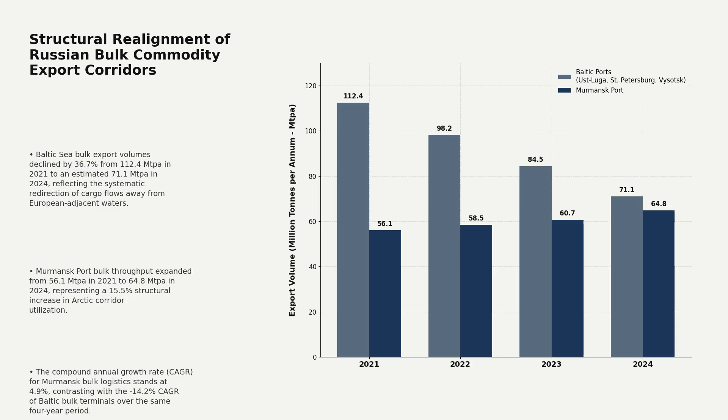The data shows a clear divergence. Baltic port bulk exports fell 36.7% between 2021 and 2024, dropping to 71.1 million tons per annum. Meanwhile, Murmansk bulk throughput expanded 15.5% to 64.8 million tons. This represents a structural shift rather than a temporary market fluctuation. The compound annual growth rate for Baltic terminals is -14.2%. In contrast, the Arctic corridor shows a steady 4.9% expansion.

Building marine terminals is insufficient without matching overland logistics. The new Lavna coal terminal features a design capacity of 18.0 million tons per annum. However, initial throughput is severely restricted by linear rail infrastructure. The primary physical bottleneck is the 46-kilometer West-Kola rail link and its 1.3-kilometer bridge over the Tuloma River. This single-track bottleneck caps initial capacity at 9.0 million tons.

Full double tracking and electrification must be completed to unlock the remaining terminal capacity. Projected actual throughput is modeled to scale from 4.5 million tons in 2024 to 18.0 million tons by 2030. This timeline depends entirely on the synchronization of the broader Oktyabrskaya railway network upgrades.

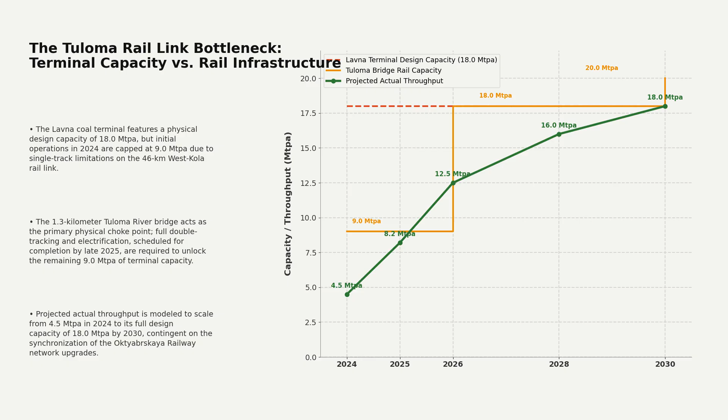The strategic value of Murmansk lies in its unique hydrographic profile. Located on the ice-free Kola Bay, the port features a 20.0-meter deepwater draft. This allows unrestricted loading of Capesize vessels up to 150,000 deadweight tons.

In contrast, Baltic ports face severe physical limitations. St. Petersburg is restricted to an 11.0-meter draft, capping vessel sizes at 40,000 deadweight tons. This shallow draft increases per-ton shipping costs by forcing the use of smaller vessels for long-haul Asian routes. Furthermore, Baltic and Black Sea routes remain vulnerable to maritime choke points like the Danish Straits and the Bosporus. Murmansk bypasses these geopolitical bottlenecks entirely, offering direct access to the open ocean.

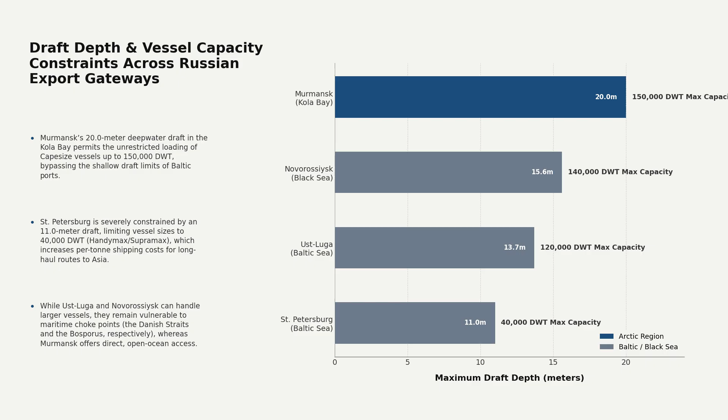This infrastructure push mirrors the historic Murmansk run of World War II, where the Kola Bay served as a vital ice-free lifeline.

The commercialization of solid-state batteries is fundamentally bottlenecked by the physical metallurgy of lithium. Lithium is extremely soft and highly cohesive. During mechanical reduction, the metal adheres aggressively to work rolls. This causes surface tearing and catastrophic foil breakage at thin regimes.

The data reveals a severe yield collapse as foil thickness decreases. At 50 microns, mechanical yield is 98.5%, and scaled down to 10 microns, yield drops to just 12%. This collapse is driven by high tensile stress and roll adhesion tearing. Simultaneously, defect density spikes exponentially. Defects rise from 0.12 per square meter at 50 microns to 35.0 at 10 microns.

Solid-state designs require foils under 20 microns to exceed 400 watt-hours per kilogram. This forces production directly into this low-yield, high-defect regime.

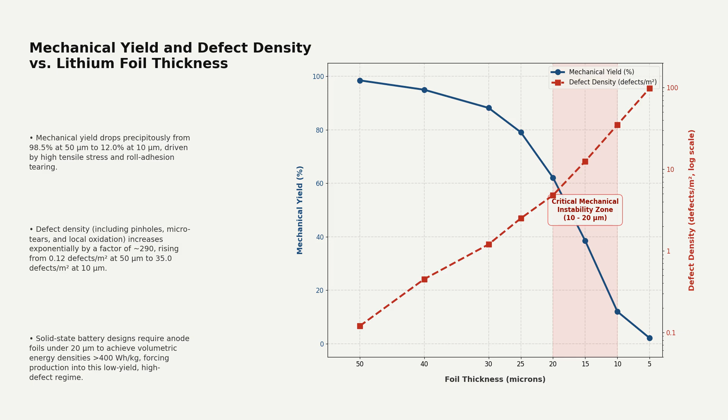Lithium's extreme chemical reactivity introduces severe thermodynamic constraints. The metal reacts spontaneously with atmospheric moisture and nitrogen. This forms highly resistive passivation layers of lithium hydroxide and lithium nitride. These layers degrade the electrochemical performance of the anode.

To prevent degradation, manufacturing must occur in ultra-dry environments. At a standard dew point of -30 degrees Celsius, the passivation layer grows at 1.25 nanometers per minute. Lowering the dew point to -60 degrees reduces this growth to a negligible 0.004 nanometers per minute.

However, this environmental control imposes a nonlinear economic penalty. Operating expenses increase 6.8 times when moving from -30 to -60 degrees. This is driven by the extreme energy demands of multi-stage desiccant wheel regeneration.

Manufacturers face a stark trade-off between throughput, capital cost, and foil thickness. Mechanical rolling is the current industry baseline. It offers high line speeds of 15 meters per minute and a low capital cost of $12.5 million per gigawatt-hour. However, it is physically limited to a minimum thickness of 20 microns.

Alternative deposition methods bypass this physical limit but introduce severe economic penalties. Physical vapor deposition can produce layers down to 2 microns. Yet, it requires high vacuum systems that slow line speeds to 2.5 meters per minute. This drives capital costs up to $45 million per gigawatt-hour.

Molten lithium coating represents an emerging compromise. It achieves 10-micron thicknesses at 20 meters per minute. However, this process requires complex surface tension management and high-temperature liquid lithium handling.

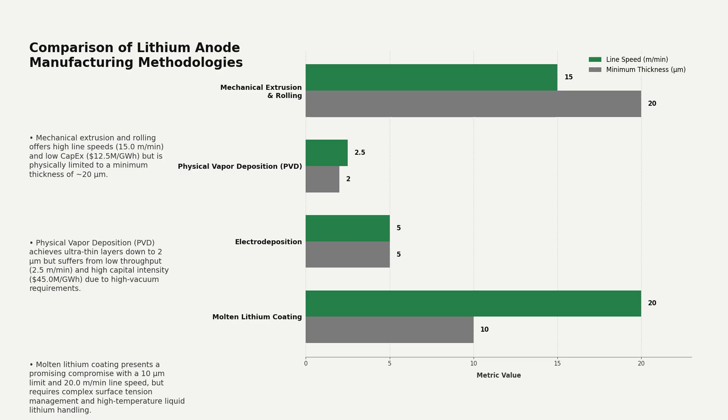This manufacturing bottleneck is structurally analogous to early 20th century aluminum rolling, which required specialized multi-roll cluster mills to overcome similar tensile failures. The commercialization of high-field magnet technologies depends on second-generation high-temperature superconducting tapes. These tapes require near-perfect crystalline alignment on a flexible metal substrate.

This alignment is achieved by depositing a nanometer-thin template of magnesium oxide using ion beam-assisted deposition.

The manufacturing process is constrained by a severe throughput mismatch. While substrate electropolishing operates at 150 meters per hour, the critical texturing step is limited to 60 meters per hour. The active superconducting layer deposition is even slower, running at 20 meters per hour.

Although the active layer deposition has the lowest linear speed, the texturing step is the primary structural bottleneck. Any crystalline defects introduced during texturing propagate through all subsequent layers, ruining the tape. Furthermore, the high vacuum systems required for these two steps account for over 75% of total capital costs.

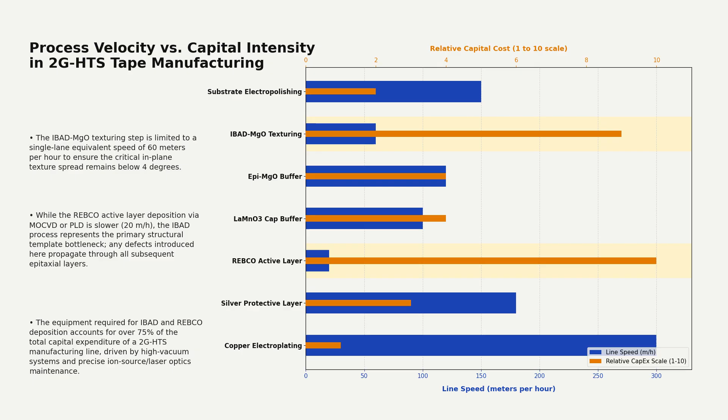The scaling of commercial fusion energy has created an unprecedented demand shock for superconducting tape. Private fusion startups require massive quantities of tape to construct compact, high-field tokamaks. This demand is scaling exponentially, far outstripping current industrial capacity.

The data illustrates a widening structural deficit. Global production capacity is projected to grow from 1,200 kilometers in 2020 to 18,000 kilometers by 2028. This represents a 40% compound annual growth rate.

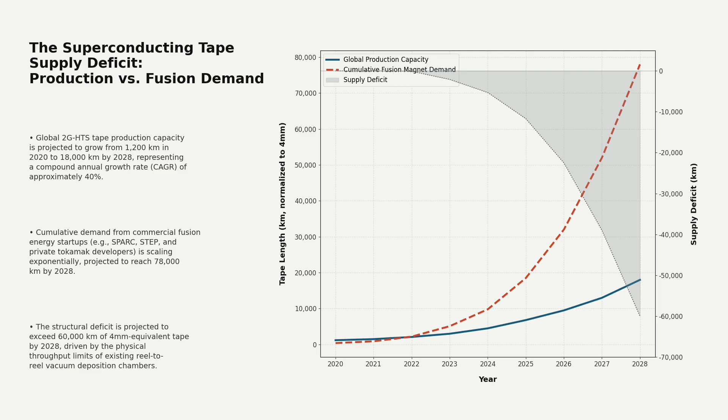However, cumulative fusion magnet demand is projected to reach 78,000 kilometers over the same period. This mismatch creates a structural deficit of 60,000 kilometers of tape by 2028. The bottleneck is physical, rooted in the low throughput of existing reel-to-reel vacuum chambers.

The throughput bottleneck cannot be solved by simply increasing the speed of the tape through the vacuum chamber. The development of crystalline alignment is a nucleation process governed by precise ion-to-atom arrival ratios.

Attempting to accelerate the process destroys the template structure: increasing the deposition speed from 0.5 to 4.0 meters per minute causes the crystalline alignment spread to degrade from 2.8 to 8.5 degrees. Once this alignment spread exceeds 4.3 degrees, the critical current density of the superconducting layer drops to near zero.

This thermodynamic limit forces manufacturers to operate within a narrow window of 1.0 to 2.0 meters per minute. This physical rate limit prevents rapid scaling of production. This bottleneck is structurally identical to the early days of optical fiber manufacturing, which was constrained by low vapor deposition rates until new axial deposition methods emerged.

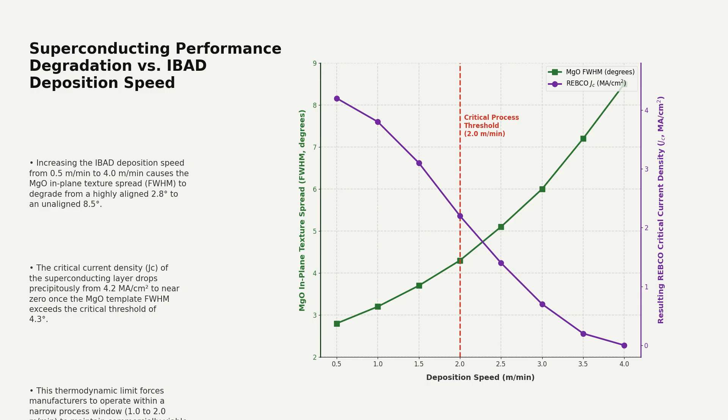Advanced semiconductor manufacturing relies on atomic layer deposition to build sub-7 nanometer transistors. This process requires trimethylaluminum, an extremely volatile and pyrophoric organometallic precursor. The global supply chain for this chemical is highly consolidated and operating near its physical limits.

The data shows global demand scaling from 120 metric tons in 2018 to a projected 300 tons by 2026. This expansion is driven by the transition from FinFET to gate-all-around architectures. These new designs require up to 35% more atomic layer deposition cycles.

Consequently, the reserve capacity margin is collapsing. The gap between global demand and total capacity has compressed from 33.3% to a projected 3.3%. A triopoly of chemical producers controls 87.1% of this capacity, creating an acute single point of failure risk.

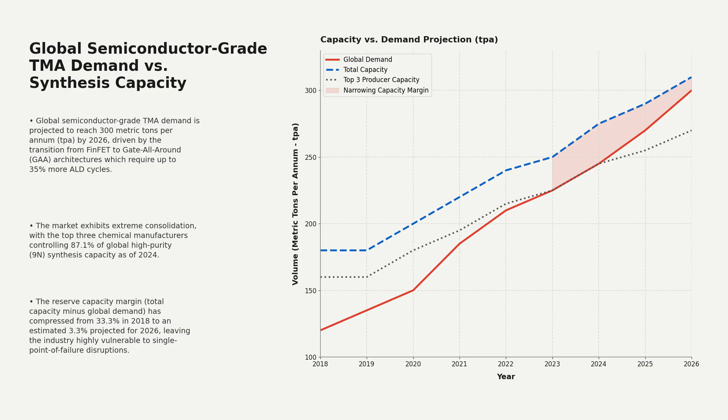Sub-7 nanometer fabrication cannot tolerate metallic impurities. Transitioning from 6N to 9N purity reduces metal contaminants from 1,000 parts per billion to less than 1 part per billion. This extreme purity is required to prevent charge trapping in gate oxides.

The operational impact of precursor purity is nonlinear. Dropping from 9N to 8N purity causes gate oxide breakdown yields to fall from 98.4% to 89.7%. This 8.7% drop represents a catastrophic loss in wafer-level profitability.

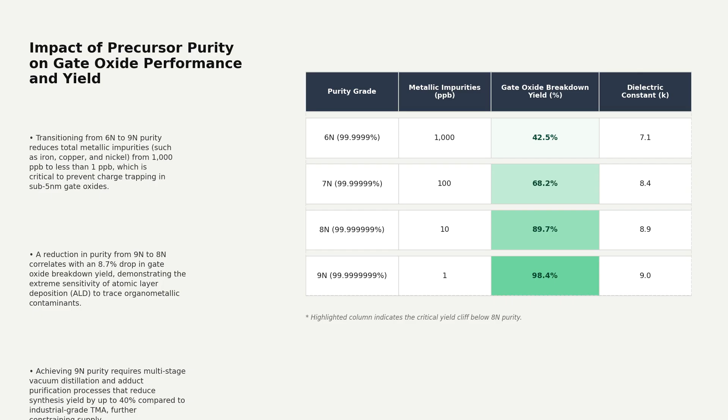Achieving 9N purity requires multi-stage vacuum distillation and adduct purification. This process reduces synthesis yield by up to 40% compared to industrial-grade alternatives. The physical chemistry of purification limits the volume of viable precursor available to advanced fabs.

Synthesizing high-purity precursors is only the first bottleneck. Transporting pyrophoric chemicals requires specialized, heavy-walled stainless steel class 4.2 isocontainers. The global fleet of these containers is failing to keep pace with semiconductor expansion.

Between 2020 and 2024, the container fleet grew 24.4%. Meanwhile, the number of active advanced fabrication facilities surged 56.2%. This deficit leaves the logistics network highly vulnerable to transit delays.

Furthermore, air freight is banned due to the pyrophoric nature of the chemical. Fabs must rely on ocean shipping, where transit lead times spiked to 82 days in 2022. To mitigate this volatility, facilities must maintain 60 to 90 days of safety stock, locking up the limited container fleet.

This vulnerability mirrors the silane gas shortages of the late 1980s. In that instance, an accident at a single Japanese purification plant halted global semiconductor packaging. Today, the highly consolidated trimethylaluminum supply chain presents an identical systemic risk.

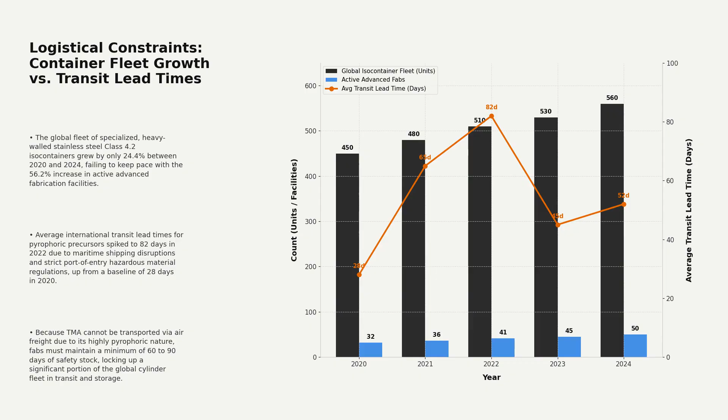The geography of European trade is governed by a stark thermodynamic reality. Routing container vessels from the Suez Canal through the Adriatic Sea to the port of Trieste bypasses the Iberian Peninsula entirely. This shortcut reduces the maritime transit distance to Central European industrial hubs by exactly 2,000 nautical miles.

The operational savings are immediate. Maritime transit times drop by 4.3 to 5.0 days. This acceleration lowers capital in transit costs and optimizes container fleet utilization. Furthermore, the shorter voyage reduces fuel consumption by 129 to 150 metric tons of heavy fuel oil per trip, representing a 28% reduction in maritime emissions. Trieste is the most thermodynamically efficient southern gateway for Central Europe.

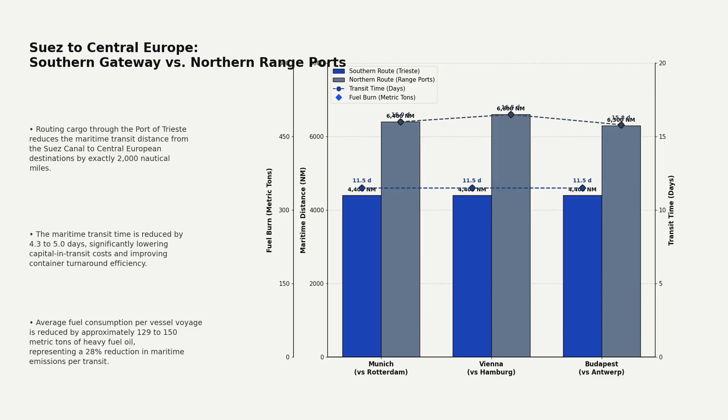The maritime efficiency of the Adriatic route is currently lost at the Alpine barrier. The overland rail infrastructure traversing the Alps faces severe physical and mechanical constraints. Steep mountain gradients of up to 2.6% limit trailing loads to just 1,100 tons. These steep inclines require expensive auxiliary helper locomotives to push freight trains over the summits. Furthermore, short passing sidings restrict train lengths to between 550 and 600 meters, falling far short of the European intermodal standard of 740 meters.

Loading gauge restrictions also prevent the transport of standard 4-meter-high high-cube containers on standard pocket wagons. To unlock Trieste, the European Union is investing in massive engineering bypasses. The Semmering base tunnel will reduce gradients to 0.85% and eliminate the need for helper locomotives by 2030.

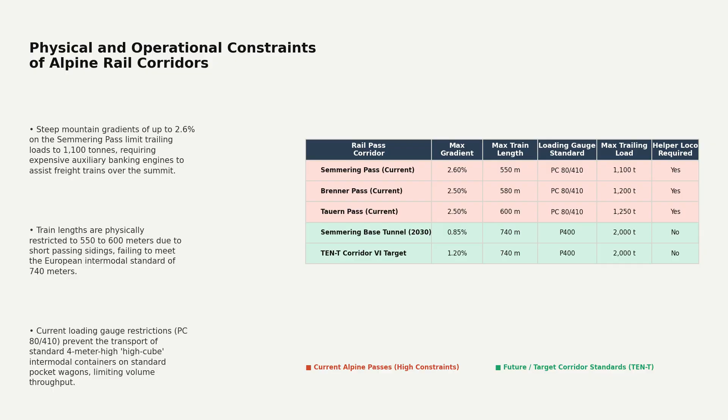The structural transformation of the Baltic-Adriatic corridor is mapped to specific infrastructure milestones. Port of Trieste container throughput is projected to scale from 0.85 million TEUs in 2024 to 1.60 million TEUs by 2030, an 88% volume expansion. To handle this influx, the rail modality share of hinterland traffic must rise from 52% to 66%. This shift transfers the primary transport burden from congested highways to the rail network.

The opening of the Koralm Railway in late 2025 will provide the first major capacity relief. By 2030, the commissioning of the Semmering base tunnel will more than double Alpine rail transit capacity to 35.0 million tons per annum. This capital-intensive push mirrors the mid-19th century construction of the original Semmering Railway. Once again, European trade velocity is bound to the physical engineering of the Alpine passes.

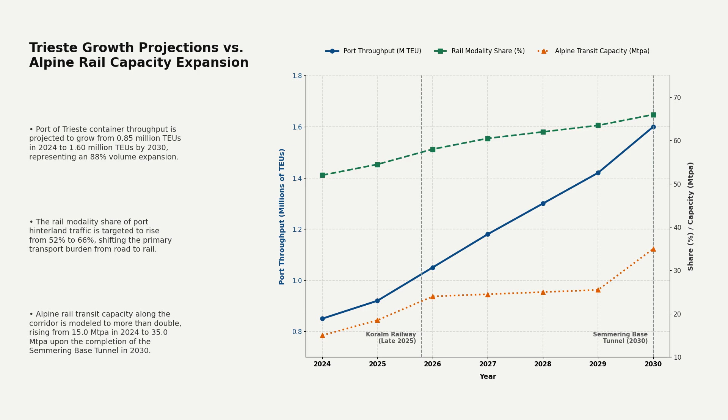Transition of power electronics from silicon to silicon carbide is constrained by solid-state physics. Silicon carbide possesses a wide bandgap of 3.26 electron volts and a breakdown electric field 10 times higher than silicon. These properties reduce energy losses in electric vehicle inverters by up to 70%.

However, the physical chemistry of crystal growth imposes severe thermodynamic limits. Unlike silicon, which is grown from a liquid melt at 1425 degrees Celsius, silicon carbide has no stable liquid phase at atmospheric pressure. It sublimates directly from solid to gas at temperatures exceeding 2,000 degrees. Single crystal substrates must therefore be synthesized via physical vapor transport inside a graphite crucible.

This sublimation process is exceptionally slow. The growth rate for 200 mm silicon carbide is 0.20 mm per hour, approximately 125 times slower than conventional silicon Czochralski growth. A single Boule run requires up to 240 hours of continuous thermal stability.

The extreme thermal environment also introduces severe thermoelastic stresses. Operating at 2350 degrees with steep thermal gradients of 45 degrees per centimeter causes structural defects. These stresses frequently lead to wafer cracking during the slicing process, limiting throughput. Scaling silicon carbide manufacturing requires transitioning from 150 mm to 200 mm wafers. Historically, this transition has been hindered by low yields and high defect densities. Basal plane dislocations propagate into the epitaxial layers, causing premature device breakdown.

The data shows steady but difficult progress. 200 mm wafer yields have improved from a non-viable 5.0% in 2018 to 51.0% in 2024. This progress was driven by advanced thermal field modeling in physical vapor transport reactors. Simultaneously, basal plane dislocation density has been reduced by over 90%, with defects falling from 9,500 per square centimeter to 850. This brings the material close to the critical threshold required for high-voltage device reliability.

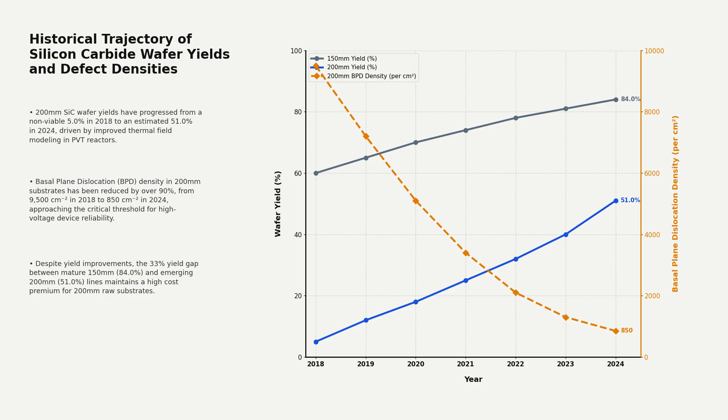Despite these improvements, a 33% yield gap remains between mature 150 mm lines and emerging 200 mm lines, maintaining a steep cost premium for larger substrates. This scaling bottleneck is structurally analogous to the synthetic quartz shortages of World War II, which required entirely new hydrothermal autoclave technology to resolve. The global transition to green steel is fundamentally constrained by raw material chemistry. Direct reduced iron technology requires ultra-high-grade ore with extremely low impurities.

Standard blast furnaces can process lower-grade ores, but electric arc furnaces cannot tolerate high silica and alumina levels. This chemical threshold makes high-grade deposits highly strategic. The price spread reflects this structural shift: the premium for 67.5% iron ore over the 62% benchmark expanded 71.4% between 2018 and 2024, reaching $78 per dry metric ton.

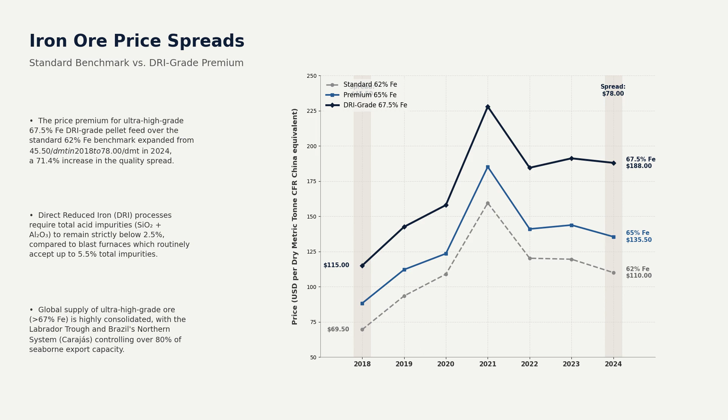Global supply of this premium material is highly consolidated. The Labrador Trough in Canada and Brazil's northern system control over 80% of seaborne export capacity, making the subarctic logistics corridor of eastern Canada a critical macroeconomic choke point.

Translating geological wealth into industrial input is bottlenecked by land-based infrastructure. The port of Sept-Îles possesses a deepwater marine terminal capable of loading massive Chinamax vessels. However, the dry land unloading systems cannot match this marine capacity. The primary physical bottleneck is the Pointe-Noire rotary car dumper, operating at 26.8 million tons per annum, over 95% of its hard mechanical design limit of 28.0 million tons.

While the dock can load ships at 8,000 tons per hour, the upstream rail-to-storage transfer rate throttles total throughput. Resolving this constraint requires a capital expenditure of 350 million Canadian dollars. This Phase 2 expansion will install a second rotary dumper to unlock an additional 15 million tons of annual capacity.

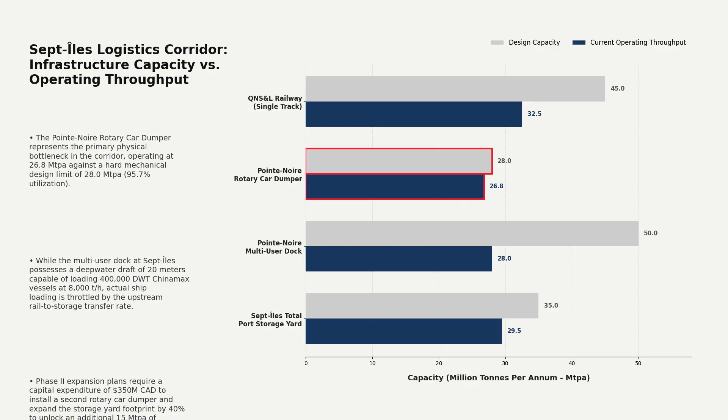Nominal logistics capacities are highly misleading in subarctic environments. Extreme winter weather imposes a severe, non-linear physical penalty on rail and material handling systems. Below -30 degrees Celsius, steel rail brittleness forces a 37.5% reduction in train length. Dumper cycle times also degrade as frozen ore adheres to the rail cars, with unloading times spiking from 45 seconds to 140 seconds per car.

Furthermore, frozen ore lumps increase the reject rate at the grizzly screen to 12.5%. These winter disruptions reduce net port throughput by up to 30% between December and March.

This logistical bottleneck is structurally analogous to the late 19th century development of the Mesabi Iron Range. There, the rapid scaling of American steel was bound to the rail capacity of Great Lakes ports, forcing a complete re-engineering of bulk material handling.

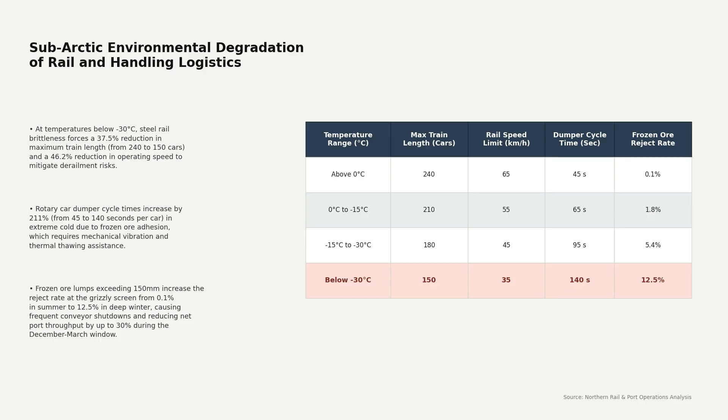Sweden's transition to fossil-free steelmaking is fundamentally constrained by shallow water. The northern Norrbotten region requires massive bulk export capacity to ship green direct reduced iron to European markets. Currently, the port of Luleå is limited by a 12.3-meter channel depth, which caps vessel sizes at 55,000 deadweight tons.

Project Malmporten addresses this physical bottleneck by dredging the channel to 15.0 meters. This allows Balticmax-class vessels of up to 160,000 deadweight tons to load fully. Consequently, annual port capacity will scale from 8.1 million tons to 22.5 million tons by 2030.

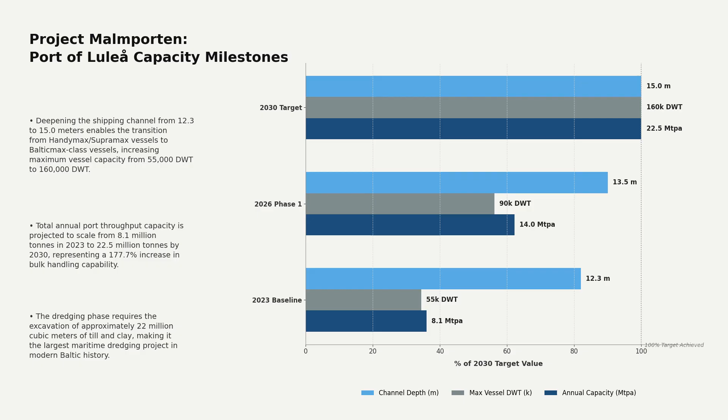This represents a 177.7% increase in bulk handling capability. The project requires excavating 22 million cubic meters of till and clay, making it the largest maritime dredging project in modern Baltic history. Dredging alone cannot resolve the seasonal realities of the subarctic.

The port of Luleå faces an average of 150 days of ice cover annually. Without assistance, winter ice reduces shipping capacity by up to 84.6% in February and March. Active icebreaker escorts mitigate these losses, maintaining throughput at 69.2 to 80.0% of baseline levels.

However, this introduces a critical dependency on Sweden's aging state-owned fleet, consisting of 5 Atle-class icebreakers constructed between 1974 and 1977. A single day of mechanical failure or delay during the freeze creates an immediate backlog, ranging from 15,000 to 20,000 tons of steel products daily.

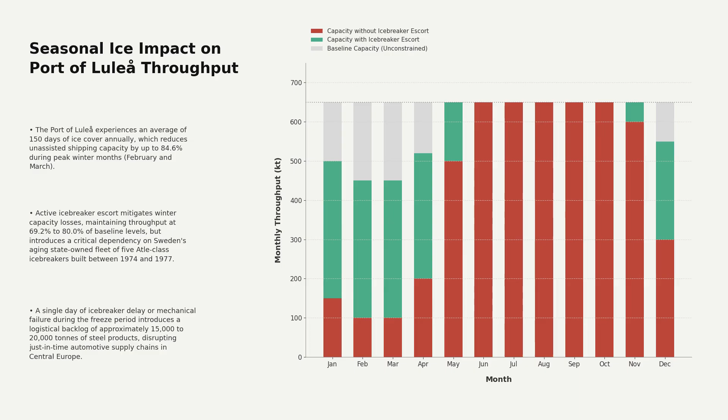Such disruptions directly threaten just-in-time automotive supply chains across Central Europe. The physical capacity of the port of Luleå is the absolute rate-limiting step for Northern European industrial decarbonization.

By 2028, regional green steel and hot briquetted iron production is projected to reach 10.0 million tons per annum. This volume exceeds the unexpanded port baseline of 8.1 million tons by 23.4%. Without Project Malmporten, a structural export deficit of 6.9 million tons will emerge by 2030.

Exporters would be forced to rely on expensive, carbon-intensive overland rail to southern Swedish ports. The expanded capacity of 22.5 million tons provides a necessary 50% buffer.

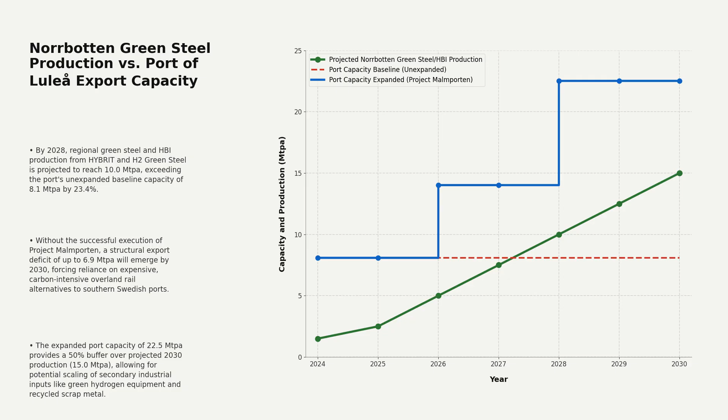This infrastructure bottleneck is structurally analogous to the late 19th century industrialization of Germany's Ruhr Valley. The landlocked steel mills of the Ruhr required the canalization of the River Ruhr and the construction of the Dortmund-Ems Canal to access global markets. Today, the decarbonization of European heavy industry is similarly bound to the physical dredging and ice-breaking capacity of the northern Baltic.